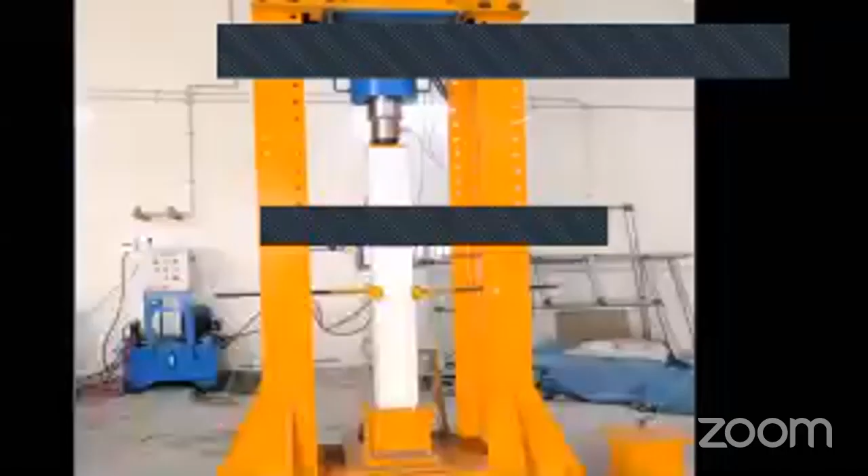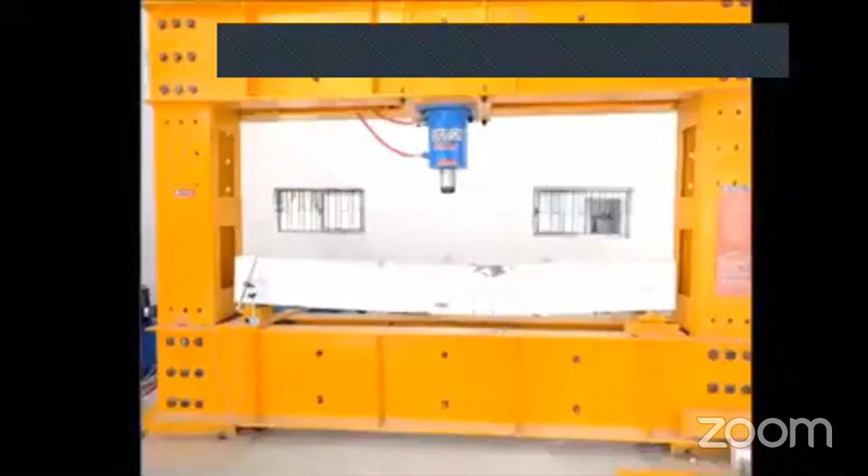The Department of Civil Engineering in Ramapuram campus was started during the year 2009, offering both BTech and MTech courses. The department is committed to providing a strong and comprehensive educational program in a state-of-the-art learning environment.

A number of teaching methods linked in perfect harmony make the learning process for students more interesting. These include guest lectures, seminars, industrial visits, and laboratory demonstrations. The state-of-the-art infrastructure includes various laboratories too.

The head of the Civil Engineering Department has been very instrumental in signing MOUs with highly reputed centers. The Indian Concrete Institute Best Students Award has been won for 3 consecutive years by the department students.

The department hosts international conferences such as the International Conference on Advances in Civil Engineering and Chemistry of Innovative Material, and the International Conference on Advances in Civil Engineering and Sustainable Construction. National conferences on the quest for advancement in civil engineering have also been conducted by the department.

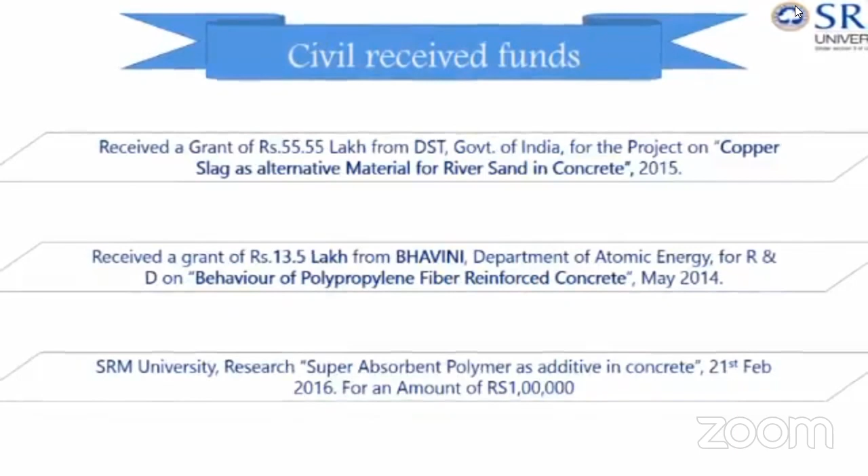Unique activities include getting hands-on experience by working on-site for a week. The Civil Department feels proud to present to you its top rankers. Students from the Civil Department are offered placements in well-reputed companies.

Once again, SRM University Ramapuram campus welcomes you to the Department of Civil Engineering.

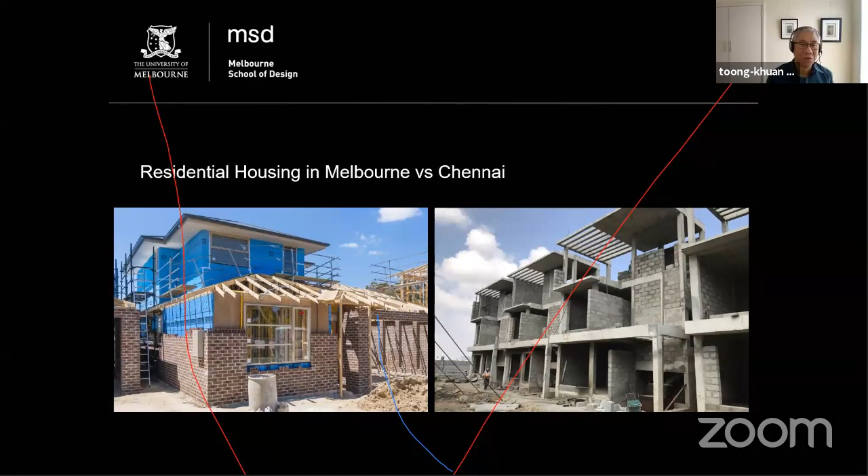If I were to show you two pictures, on the left-hand side is a residential building in Melbourne, and on the right-hand side is a building in Chennai. If you look carefully at the two buildings, the building in Melbourne is actually a timber frame building, so we use a lot of timber for our residential houses. In India and in many parts of the world, instead of using timber, you use concrete frame with a brick infill for wall. So my question to you, we can discuss after the presentation: what goes into a building? Why do different builders in different countries build differently?

We all know that the input into construction or into building is material, labor, machines, and money, correct? And if you look at a developing country, many developing countries are also pushing to adopt more new technology, which means that your construction will become more and more expensive.

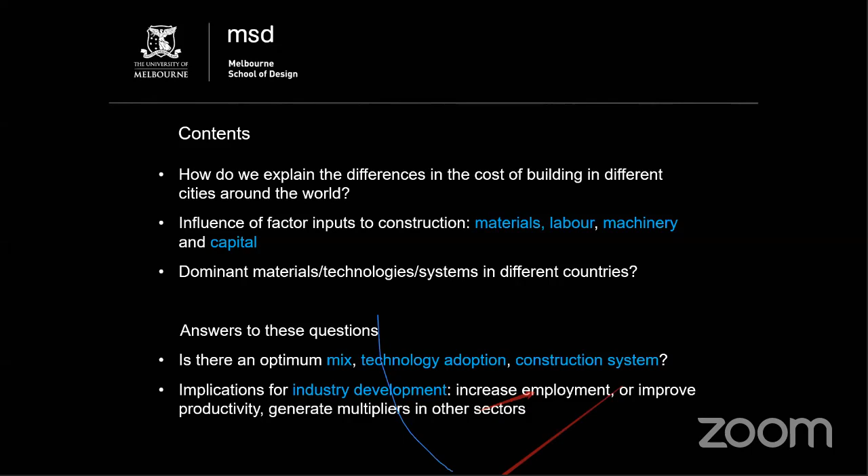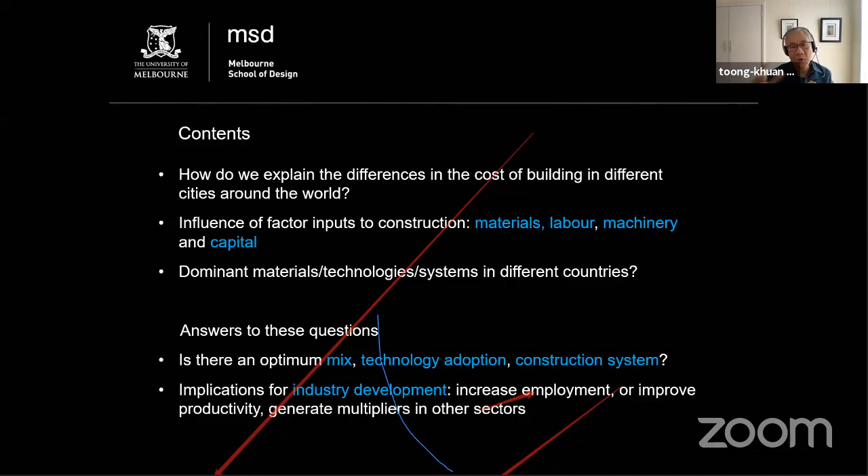So what my research is trying to do is ask a few very important questions. Is there an optimum mix? Do we need to use the most modern technology, or do we use labor-intensive construction methods? And what are the implications for industry development? How do you improve your building industry, how do you improve your construction industry? So keep all these questions in mind, and I will try to explain.

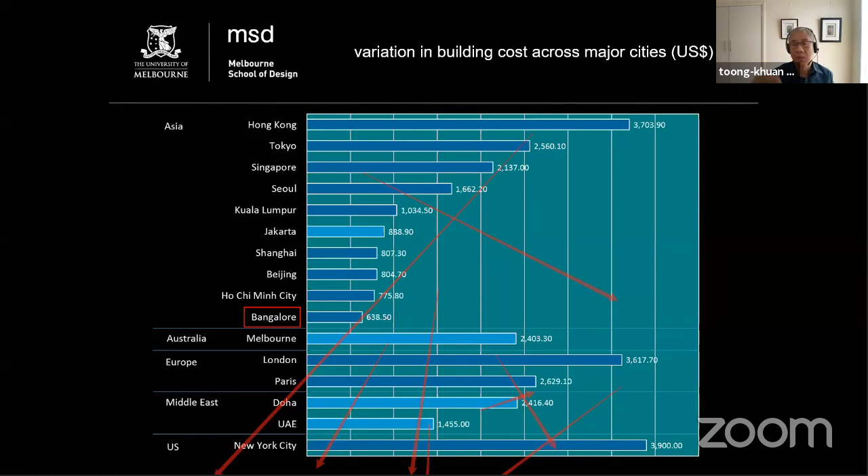The most expensive place to build is in Hong Kong, and one of the cheapest places to build is in Bangalore, India. You have to remember one thing: land cost is not included in this. So this is just construction cost, the cost to build a building, and this is average across various building types.

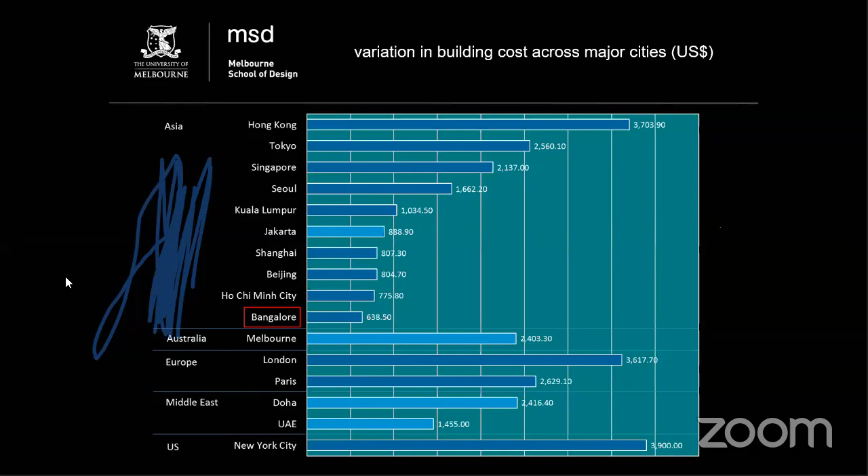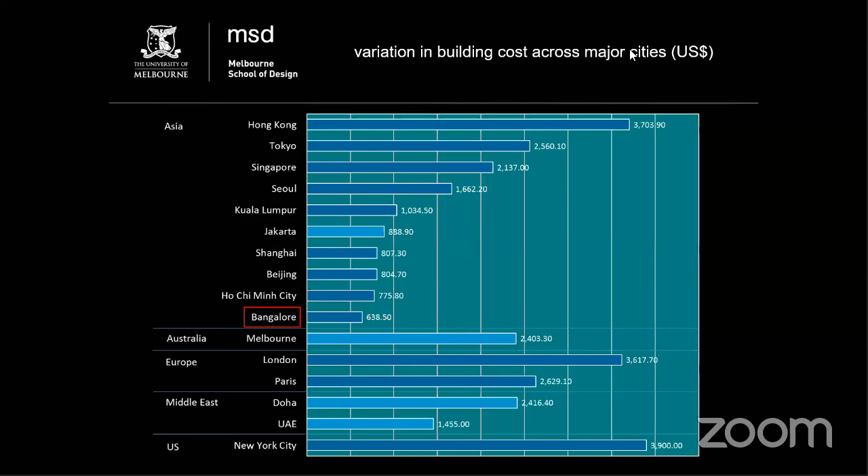Professor, sorry for interrupting. No problem. Can you just close the PPT once and reopen with the option to disable annotation? Okay, let me share, disable for screen annotation. There you have options in the annotation bar. I don't think it's me. Somebody else, so you can disable that, disable the annotation. We are close to finding out who that is; yesterday we could identify it. We are planning to report it at their official place, we'll do that soon. You are sharing screen, how do I disable participant annotation in the share screen bar? Okay, got it, found it. Thank you, sorry for the disturbance. No problem. So what I can do is clear all drawings. Did you unmute? You have unmuted annotation? Yes, so I disable, do not allow participants to annotate. Okay, good, because I was wondering what was going on. Sorry about that.

Okay, so if you look at the building costs across Asia, Bangalore is the cheapest, Hong Kong is the most expensive. Now, I am physically in Melbourne, so if you look at Melbourne, it is four times more expensive than Bangalore in India. My question is, why? And hopefully at the end of this presentation, you will understand why.

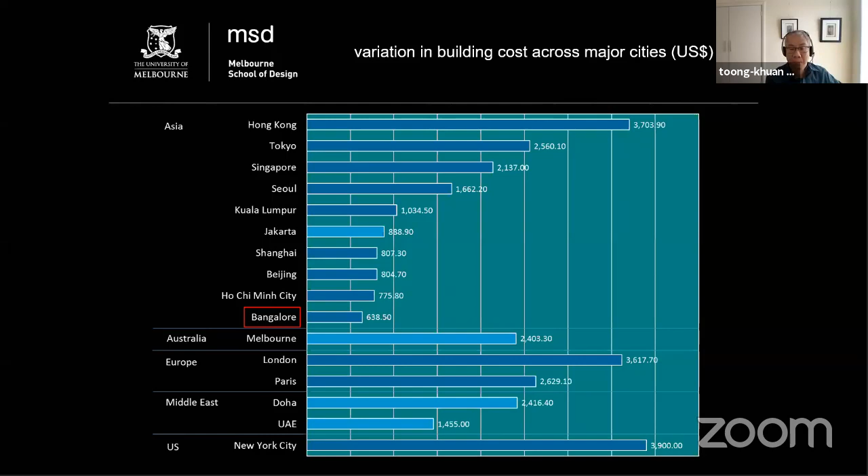Why can't I move to the next page? Okay, now what I've done here, I have to start to explain what's going on. On the left-hand side, I have sorted countries from Switzerland to Uganda based on World Bank income data. So above 12,000 US dollars, the World Bank classifies them as high income countries.

Between Indonesia and Turkey, these are upper middle income countries, more than 4,000 US dollars GNI per capita, and lower middle income, which is where India is, above 1,000 US dollars. So once you understand this, high income countries are here, lower income countries are at the bottom. That's on the left-hand side.

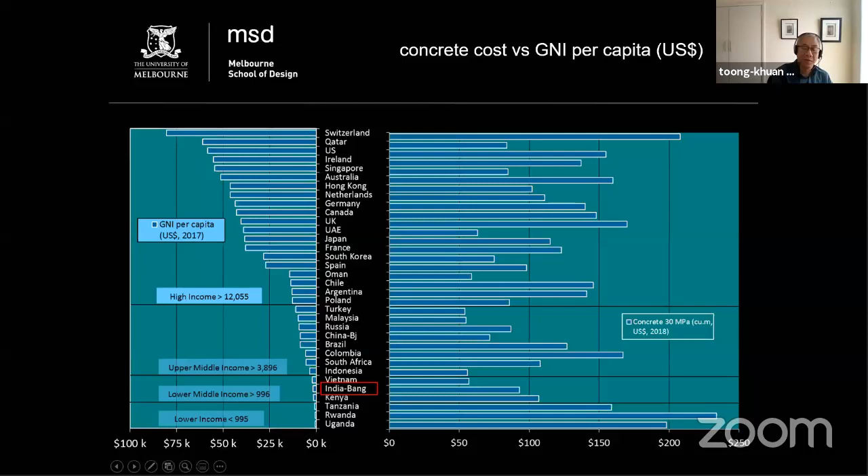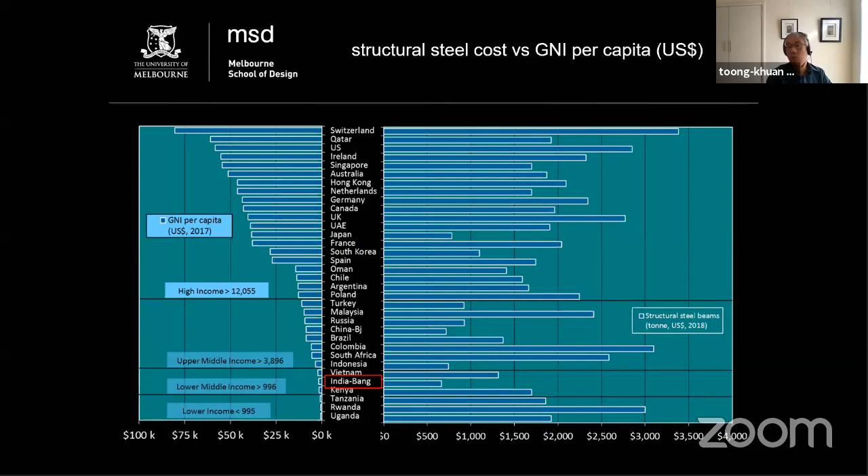Again, on the left-hand side it's the same, Switzerland to Uganda. But on the right-hand side, I am now looking at structural steel—the steel beams and columns we use for buildings. Structural steel beams per ton are more expensive in some countries and cheap in others. What do you notice here? If you look at China, structural steel is cheap. If you look at India, structural steel is cheap. So what I'm trying to show is that if your country is a producer and exporter of steel, your steel prices are generally low. Looking at Indian statistics, India is the second largest producer of steel in the world, second only to China, so obviously steel prices are low. As long as you produce and export steel, it will be relatively cheap in your country.

But what we've done here is compare all these prices based on US dollars. Some academics also use purchasing power parity to compare prices, but it's very hard for us to understand—what is $1 compared to Indian rupees? What's the conversion rate today? I think it's $1 to 70 or 75 rupees, so it's very hard to understand conversion rates. So what I'm going to do today is propose an alternative measure, a new measure, to allow us to compare materials, labor, and technology.

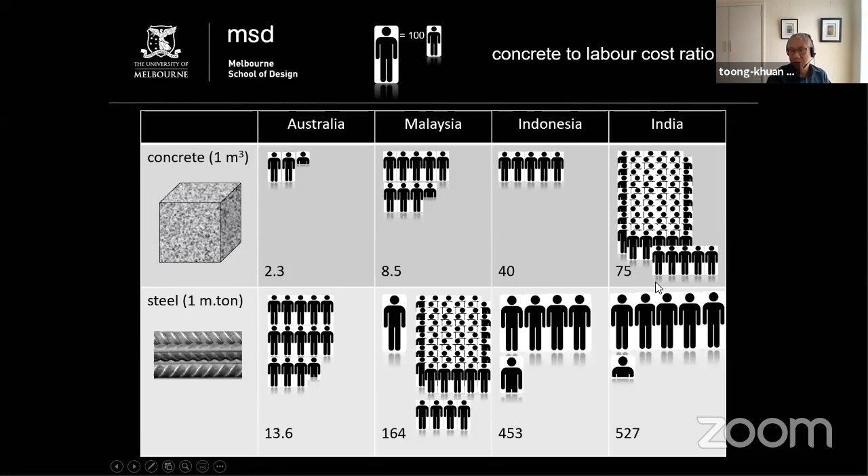Following on the global comparison, instead of showing income on the left side, I've plotted the high income countries on the x-axis. So all the countries are on the x-axis. Switzerland is here, Uganda is there. These are the higher income countries, and that's the GNI per capita shown here. High income countries are over here, upper middle income countries are here, lower middle income countries here, and so on.

Now what I'm plotting is that 1 cubic meter of concrete is about 9 hours of wages in Qatar. But concrete is generally cheap in high income countries, and very expensive in lower income countries. If you remember what I said previously about foreign workers in Qatar, Singapore, the Middle East, and Oman, it basically distorts the prices of concrete in these places.

Now, if you look at India, you'll realize that concrete is very expensive. When concrete is expensive in India, you'll find that many construction projects will try to use as little concrete as possible while using more labor. So when the conditions in your country are different from another country, you'll choose different methods to build.

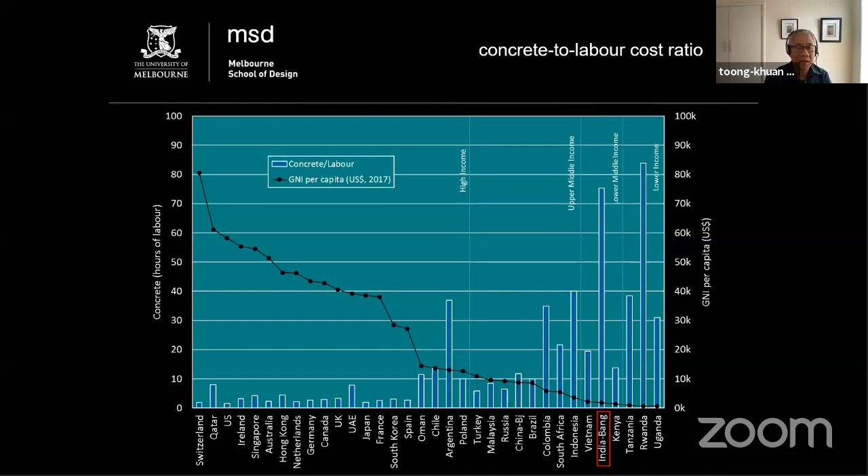So these are some of our findings. Labor is expensive in high-income countries, but concrete is expensive in lower-income countries. So in a place like Australia, we'll look for construction processes that reduce labor, because labor is very expensive. Whereas for a country like India, you'll use construction methods that reduce concrete, because concrete is expensive. So you'll try to use more labor and less concrete.

Okay, another product, structural steel. 1 ton of structural steel is equivalent to 27 hours of wages. 1 ton of structural steel is equivalent to 534 hours of wages in India. So it's very much the same thinking process - it is very expensive to use structural steel in a lower income country. Look at Indonesia, it's about the same, 533 hours of wages for 1 equivalent ton of steel.

So what we can say about this is that countries like Malaysia, Indonesia, and India, your labor cost is very, very low.

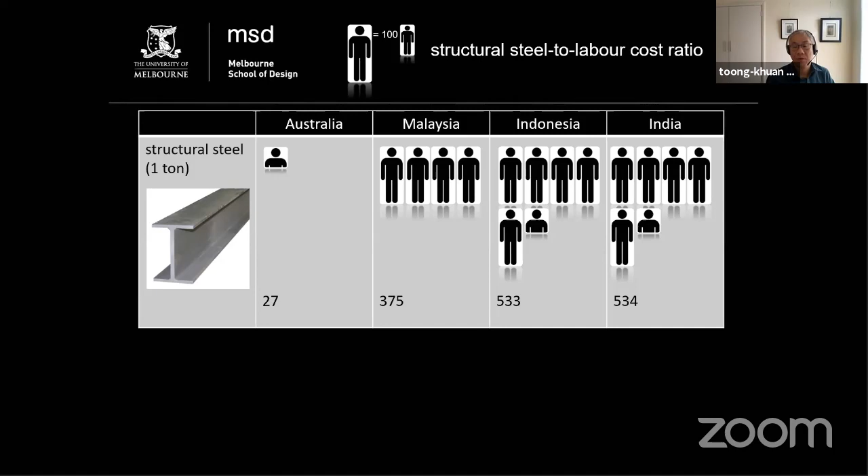So this is another comparison now, comparing two materials. If we look at steel to concrete ratio, you now have this combination - you compare steel on one side and concrete on another side. And the ratios look pretty much the same.

Reinforcements to concrete, again, it's relatively similar for the rich countries, but reinforcements seem to be expensive for countries that need to import these reinforcing bars or structural steel. If you look at India, it's relatively cheap. So that may help you understand how to convert your construction industry into using the materials that are cheap in India.

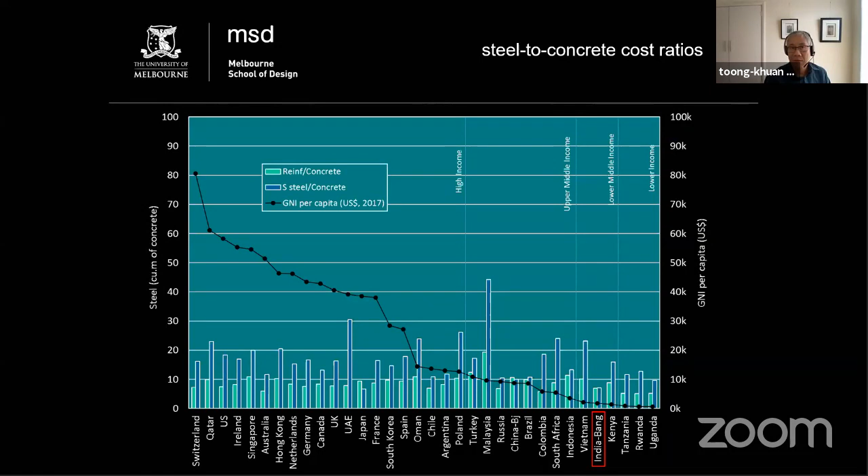This is another comparison, bricks to concrete. If you look at bricks to concrete, we're comparing 1,000 bricks. 1,000 bricks is equivalent to 3.9 cubic meters of concrete in Australia, but 1,000 bricks is equivalent to 1 cubic meter of concrete in India. So by looking at this, which material do you think is more economical to use in Australia and in India? Can you think about this? Now, if you look at this, it would mean that in Australia it's cheaper for us to use concrete, and in India it's cheaper to use bricks.

Brick versus concrete: in India, bricks are cheap; in Australia, concrete is cheap.

Timber - this is 100 meters of timber used for building, 100 mm by 50 mm cross section. So that's a piece of timber of that cross section, 100 meters in length. Now, 100 meters of timber is equivalent to 1.4 cubic meters of concrete, 2.8 cubic meters of concrete in India, and 7 cubic meters in other parts of the world. So in Australia, timber is cheap; in India, timber is average. So this helps us, again, to understand what materials to use.

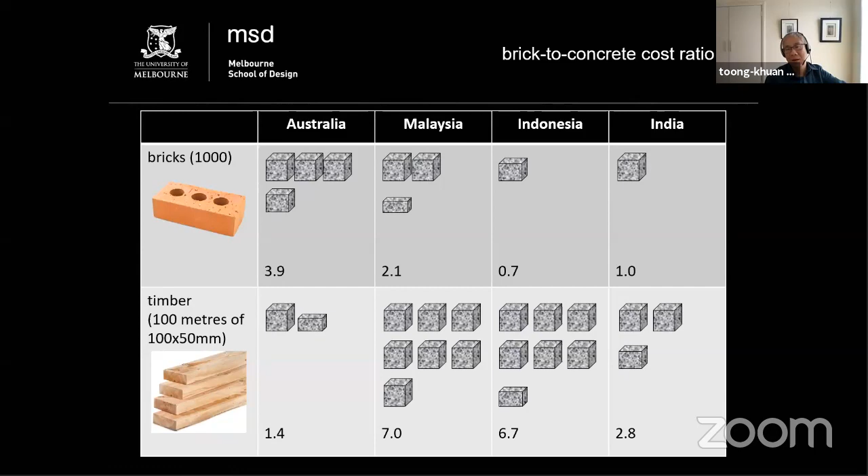Okay, and across the world, so this is another comparison of materials all across the world. Now, if you look at India, brick is cheap, timber is somewhere in the middle, all right?

So you should understand that when bricks are cheap, you should always try to use more bricks. Now, which are the countries where the bricks are terribly expensive? Middle East. Look at this. Qatar, Middle East is showing very expensive bricks. UAE also is showing that bricks are terribly expensive. If you look at Singapore, timber is very expensive.

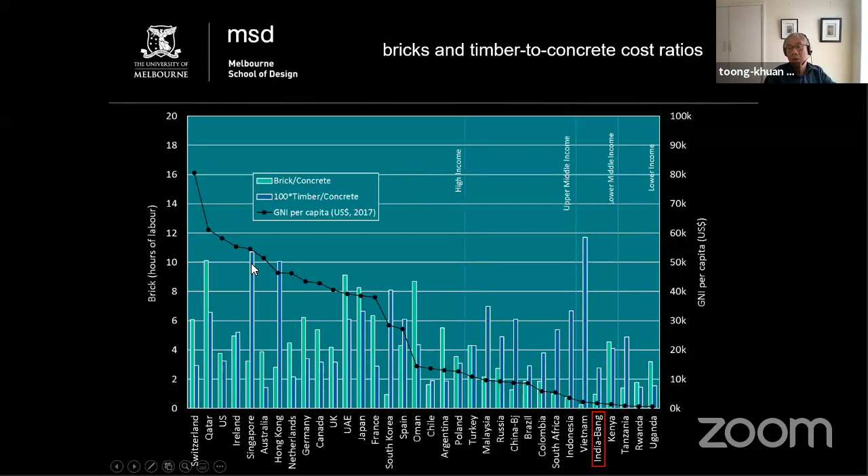So it helps explain why certain countries just do not have timber. For example, Singapore is an island state. Timber would be very expensive out there. So they do not build using timber. Bricks are imported, therefore they are expensive in the Middle East. Bricks are relatively cheap in middle and lower income countries. It is easily available. It is a low technology building product.

And my suggestion is that if you are building a lot of buildings, you should be using what you have, what resources you have in your country. If you have lots of brick, you use brick. If you have lots of timber, you use timber.

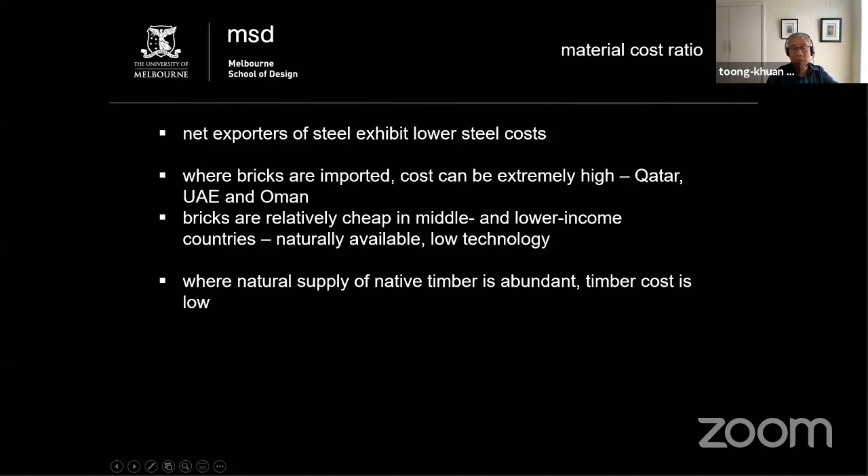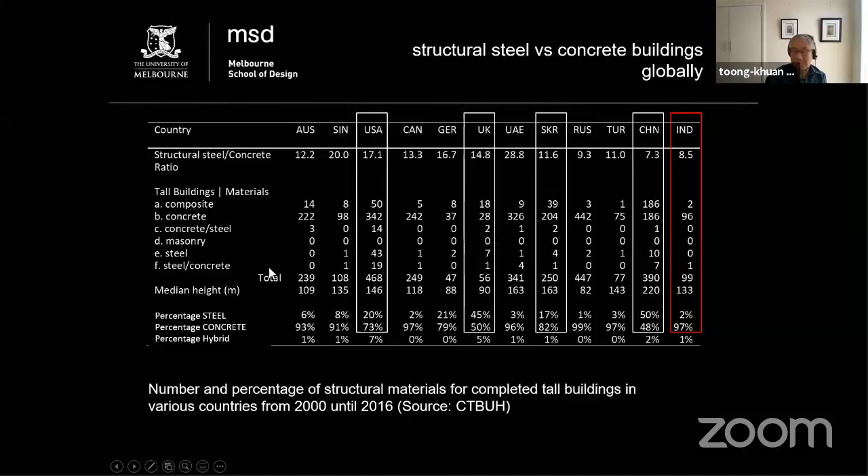So what I'm trying to say from this slide is this. When the steel to concrete ratio is high, it means that steel is expensive, less steel is used. So we will then use more concrete. When steel to concrete ratio is low, that means that steel is cheap. Therefore, you use more steel and you use less concrete. But of course, India is an exception. So it's something that we can talk about.

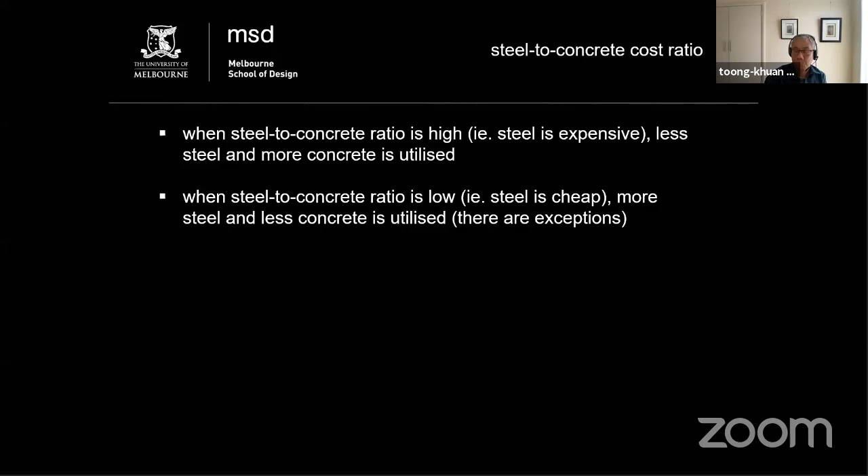This is another cost I want to discuss. All of us are civil engineers. So if you look at a reinforced concrete slab, I am working out the cost of a reinforced concrete slab, which is about 200 mm thick. So first of all, you need steel reinforcements. And I've worked out that the average steel reinforcement ratio for a 200 mm thick concrete slab is 150 kilograms per cubic meter. Concrete slab is 200 mm thick, grade 30 concrete, and you need timber formwork to support the concrete.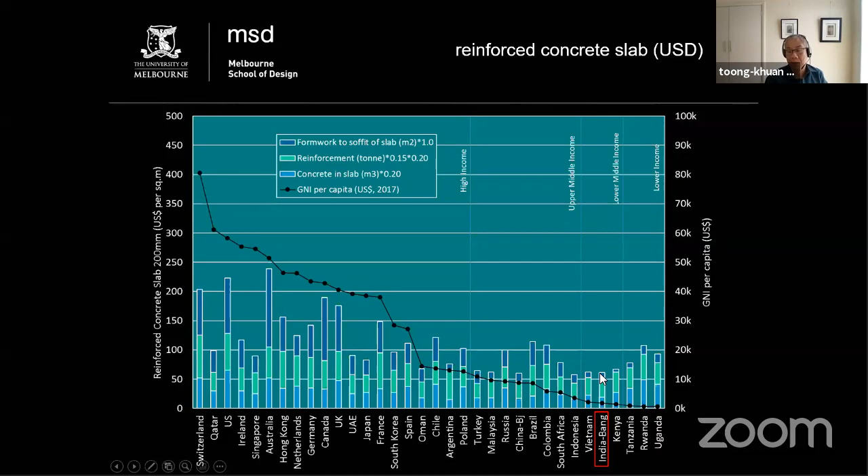So what can we learn from this? Formwork cost is very, very high in a high income country because we have to engage workers and workers are expensive. Formwork cost is low in lower income countries due to lower labor costs. And countries with migrant workers, foreign workers, for example Middle East, will exhibit lower formwork costs because they don't have to pay that much for construction workers.

So my question to you in India is this: should you adopt more technology or should you use more labor-intensive construction methods? Something to think about.

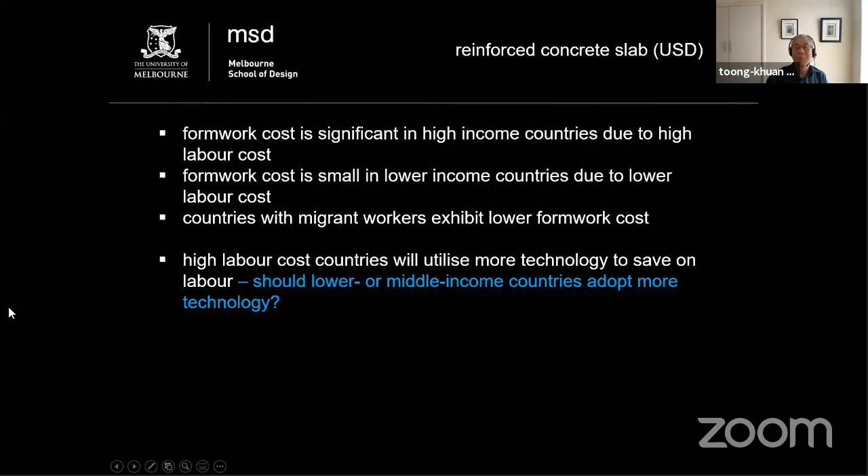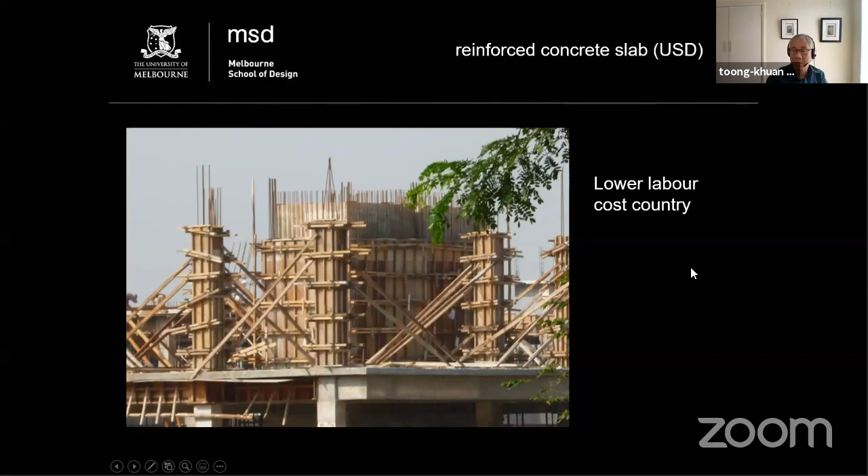Now, if you look at this picture, this is obviously a very manual process of building. This is a photograph taken in Malaysia. So the columns are all using timber formwork, all manually assembled. This obviously comes from a low labor cost country.

Look at this picture over here: precast concrete columns, metal formwork for the slabs, mesh reinforcements, precast lift shafts, precast stairwells. This is obviously a high labor cost country because everything is prefabricated.

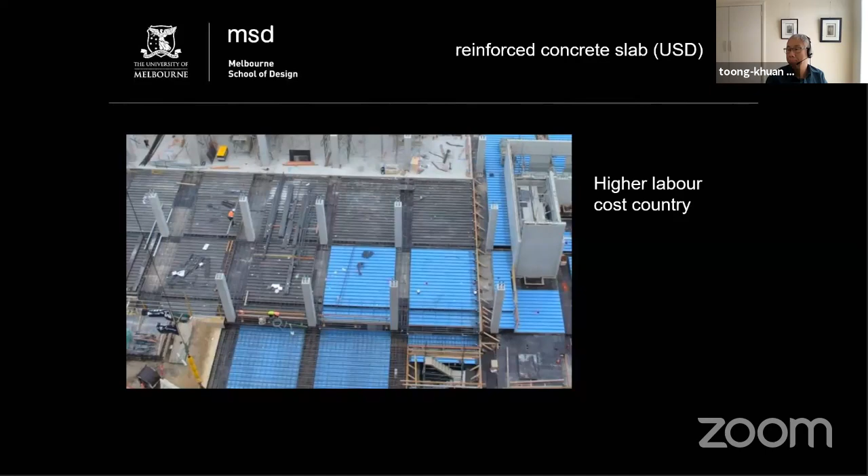So for lower income countries, machinery tends to be very expensive. What I'm trying to say here is this: technology is expensive in lower income countries.

So what are the implications for your building industry if they want to develop? What do you have to do? If you have full employment, you may then invest in technology. If you do not have full employment, it may be worthwhile to invest in training your workers, improving workers' income levels, and teaching them to work more productively.

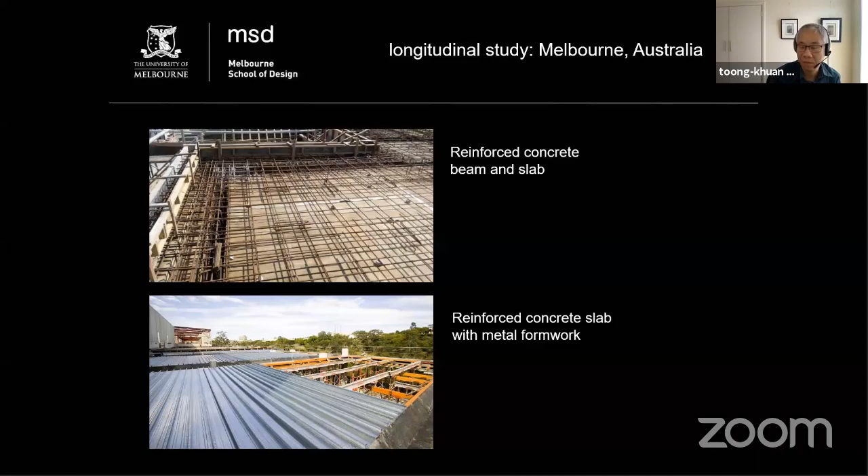All of you are civil engineers, so you should be able to identify all these different technologies. Number one, reinforced concrete beam and slab: that's timber formwork, reinforcing bars, beams at the sides, and this will be very labor intensive. The second method is the same reinforced concrete slab but with metal formwork. So instead of a timber formwork, this is metal, and the metal will remain in place.

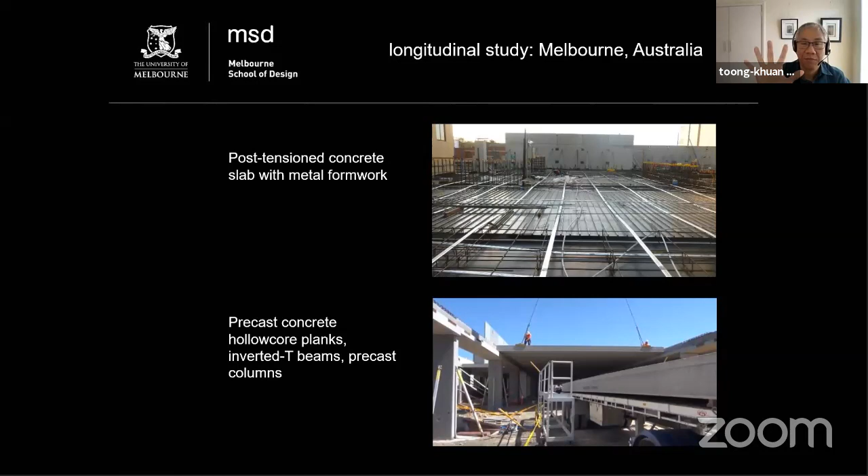The third method is post-tension concrete, where we put post-tensioning of pre-stressed strands into the concrete. You may have learned this in your engineering degree. You can also combine post-tension concrete with metal formwork. And the last system is precast concrete: here you can see precast hollow core planks, precast beams, and precast columns. So I'm actually comparing 5 different construction systems.

Now, what I mentioned earlier is this: the labor per hour is here. You can see that labor costs increased. Concrete material has also increased, but the ratio has decreased. So the ratio of concrete to labor was about 8. It then fell and started to stabilize at around 4 or 5. So there is a change in that particular ratio.

Now if you look very closely - sorry for the size of the figures, they're a bit small - on the left-hand side is reinforced concrete. If you look at 1979, the second system that appeared, reinforced concrete with metal formwork, was more expensive. In 1975 when it was introduced, 1979, 1985, 1987, during those periods, metal formwork was more expensive. But when labor costs increased, you'll see that metal formwork became cheaper. Metal formwork after 1990 was cheaper than reinforced concrete.

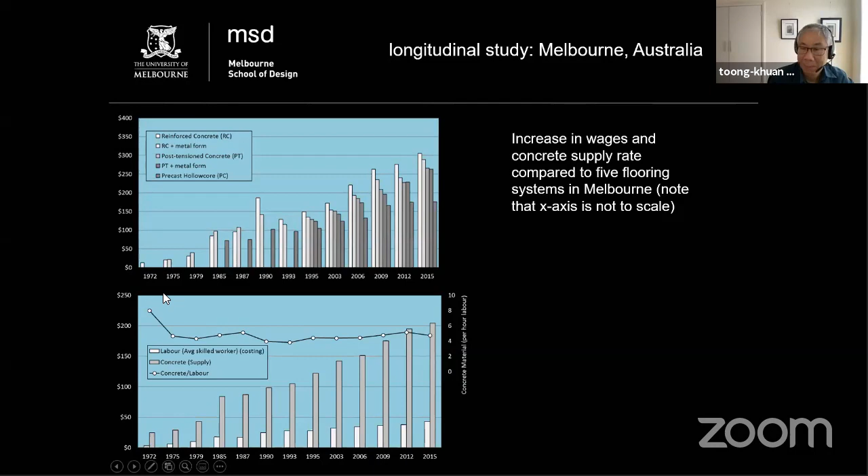So we have transitioned our construction methods from more labor to more capital. We are using a lot more materials, and we waste materials sometimes because material to us is cheap, labor to us is expensive. So this helps you understand why we choose a particular technology here in Australia.

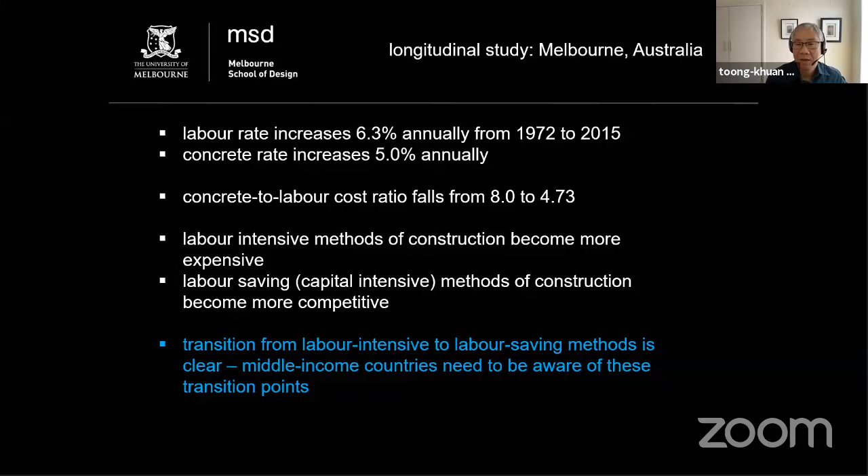You may have to do the same study in India for you to understand why you are building using the methods that you use.

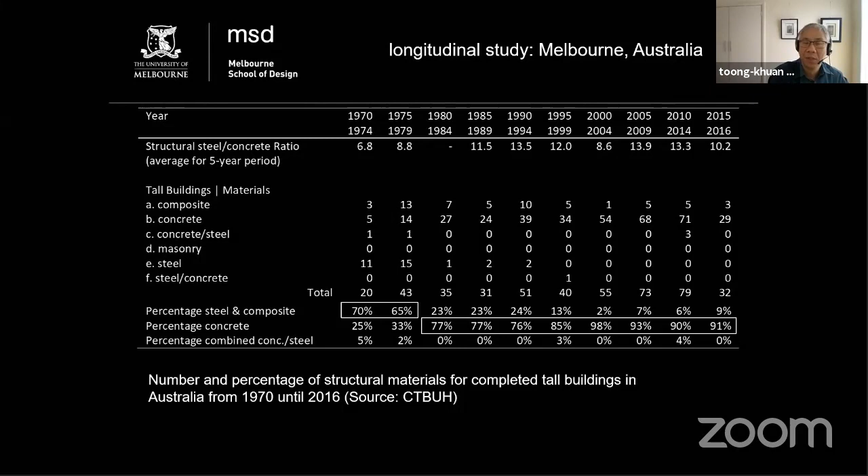That helps explain how we change from one material when steel was cheap to concrete when steel became more expensive. The steel versus concrete ratio increased to more than 13 after 2005, and we moved from building out of steel to building using concrete. So the choice of building technology is based on material cost ratios.

You will have to use what is abundant in your country, because things like cement, bricks, and timber are very often locally produced. So you will have to check if these materials are easily available. If they are, you build using these materials.

If you have to import materials, use them very carefully, because the value add is then lost overseas. If you have to buy these materials from overseas, you will lose a lot of revenue and your construction cost goes up.

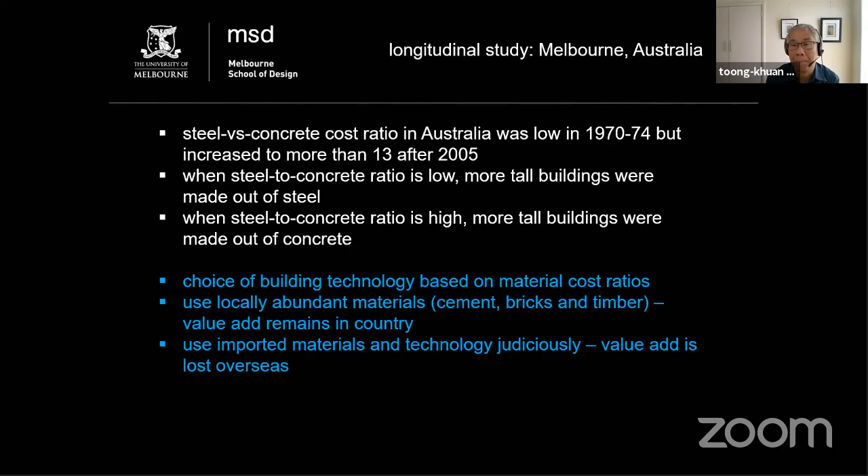What I want to talk about now is to introduce some of the newer building materials to you. This is a new product that has been used in Australia for the last 10, 15 years. It's called cross-laminated timber. You may be aware of the old timber where it is just pieces of plank, pieces of timber used to build buildings.

Now, cross-laminated timber is almost like plywood. It's layers of timber glued together to make panels. These are some of the panels that were sent to the university for testing. We have worked together with some testing labs to make sure these panels work as a composite panel between concrete and timber.

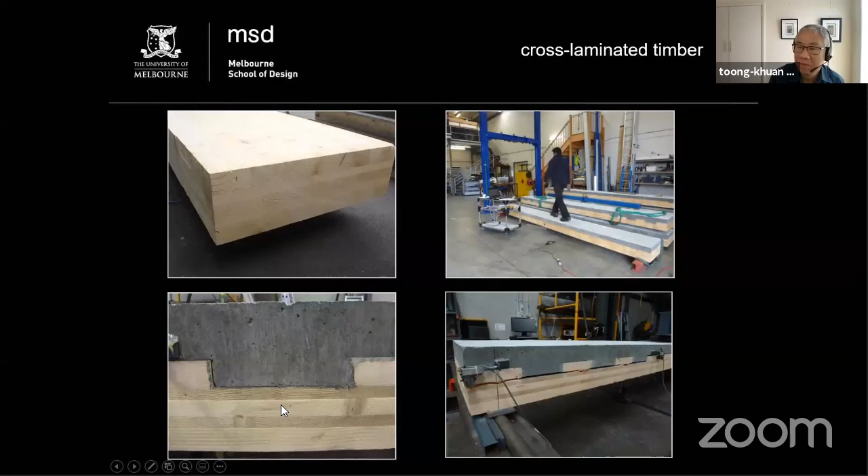But what I'm going to show you next is a building that is mainly structural timber. This building here in Melbourne uses cross-laminated timber for the floor, for the beams, and for the columns. So this is an entirely timber building, built using cross-laminated timber.

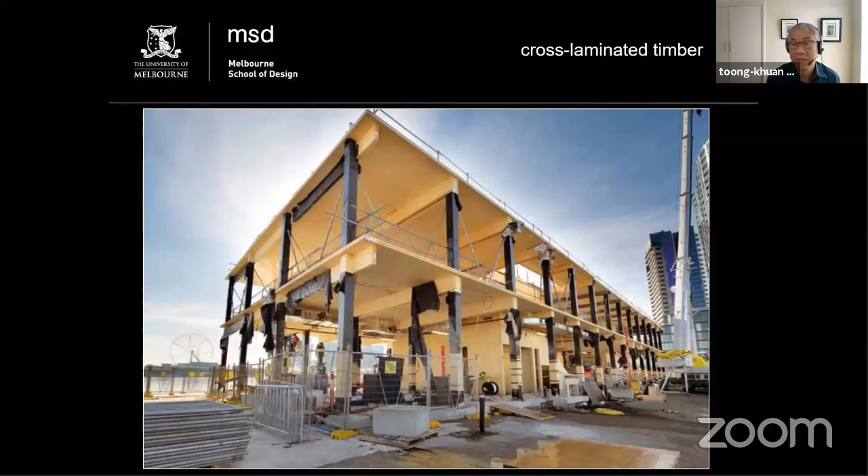Therefore, this building was built out of timber as opposed to steel or concrete, because timber, number one, doesn't rust when it's exposed to seawater. Number two, it captures carbon. So we consider this a very sustainable way to build. Very green. Okay, so what have we learned today?

In terms of industry, in terms of how you can improve your Indian construction industry, I would suggest you think about these three things. You always try to invest in training of your workers, and always try to improve overall output per worker, or improve labor productivity.

In terms of materials, you will try as much as possible to use locally available materials because this gives you the lowest construction cost. It also increases the value that you add to your local economy. The idea here is to always try to grow your local supply chain, but maintain resource efficiency.